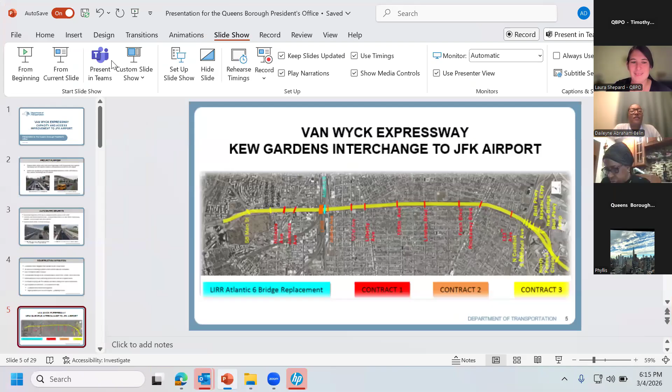Just let me share my screen. Can you guys see my screen? I have a lot of stuff on my desktop. Yes, yes, we can. Okay, we're going to do selection from Megan. Okay, so—

The Van Wyck is a capacity improvement project. The Van Wyck Expressway project basically spans from the Kew Gardens Interchange all the way to the westbound connector, which is about near Federal Circle going into the airport. The purpose of this project is to enhance traffic safety between those points—Kew Gardens and JFK. We made operational and geometric improvements, and structural deficiencies are being addressed on this project.

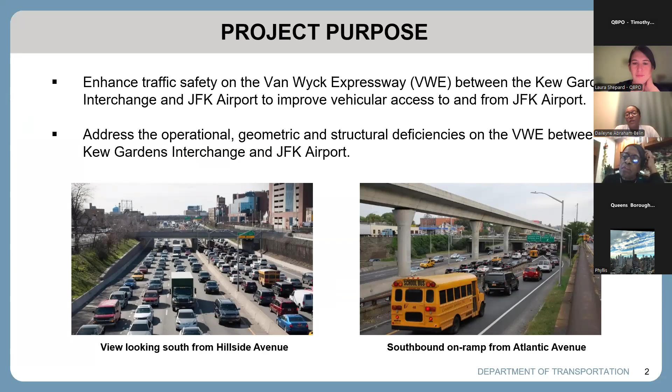So there's a lot of things happening that may not be that visible to you, but there's a lot going on with this project. The anticipated benefits—obviously we think there's going to be improvement with safety, because when we have that dedicated lane, you're not going to have people trying to make their exit to go to the airport by cutting from the left lane all the way to the right. So it's a dedicated lane that's going to take you straight to the airport.

The Port Authority also has a project we're coordinating with, called the Westbound Connector. So where we end, they start, and this will take you to Terminal 1 and 4 at the airport. We're also building a loop ramp that will take you from the Van Wyck to the Nassau Expressway to JFK, which will take you to all the other terminals you need to reach.

We anticipate reduced travel time, again because of this dedicated lane—you don't have to mix with the traveling public. You're going to have three dedicated lanes on the right for people going in and out of the Van Wyck, and then this lane that you enter but cannot exit until you get to the airport.

So basically, once you get in, it's a straight shot to the airport. We anticipate that it will reduce truck traffic as well on the local roads, because now with this added lane, and we have these three other lanes, so the trucks can go on and there'll be better movement on the Van Wyck.

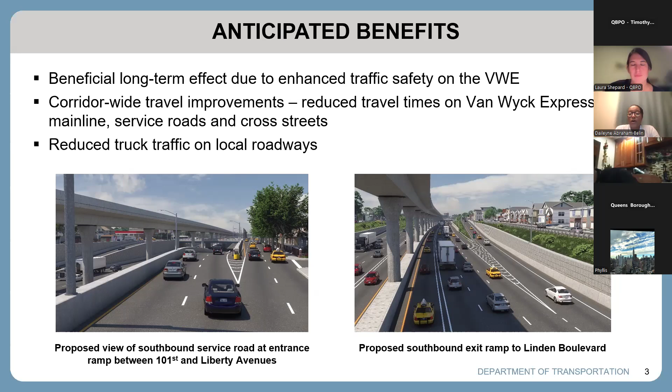Just in general, I wanted to touch base on some of the mitigation that we did throughout the project. As far as noise mitigation, we have a plan that's submitted by the contractor. We do air noise monitoring - that's a normal thing. Dust control, rodent control measures that we have.

We do have a community liaison for the project that if you need information, you can reach out to him, or reach out to either one of us, Luis or myself. We'll be happy to answer any questions that you have. We do provide notices, and that's the community liaison will send that out, or our executive office, our main office is in Long Island City. They will send out those notices when we're making changes to traffic patterns, if we're closing lanes, just so people are aware of the changes so you could plan for your travels.

There's a lot of coordination, like I said, with the Port Authority, especially on the south end of the project, because they are working there. So it's very tricky because anything that we do affects them and vice versa. So we have to be on the same page when we're doing any lane closures.

And any complaints that come in, we try to address them as soon as possible, whether it's potholes, refreshing striping. We just had these two major storms, so right now we're in the process of going out and we're going to be doing pothole repairs and some striping refreshment, because that way people don't get into accidents and your car's not damaged. But we had to wait for the snow to melt to be able to go back, and if it's raining, we can't do that. So bear with us, we're aware there are some areas that need some improvement, but the contractor is going to be taking care of that as soon as possible.

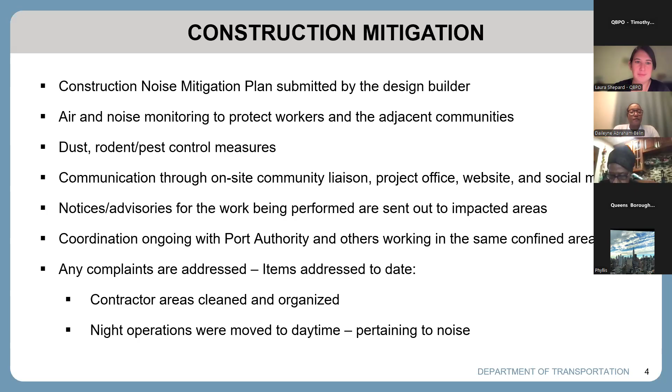So I just wanted to give a little bit of background on the Van Wyck. I know people know that we've been there for a while, but just for your reference, this project consists of four different projects overall. So the first one that we did was... can you see my cursor? Can you guys see where I'm pointing right now? Yes, we do. Okay, so right now, Atlantic 6 was the first project that we did.

So this was for Long Island Railroad. What we had to do in order to provide this extra lane, we had to widen the Van Wyck. In order to do that, we ended up having to take care of the bridges first - that was the first step. We had to push back the abutments. So this was the prototype that we did, and that was done in 2020, completed at the end of 2020. So it's a smaller project, but that's the first one that we did as a design build.

The second project, which was contract 1, and that's all the ones that you see in red here, that was about 9 bridges that we had to do. Luis was also the project manager on that, and we widened all these bridges in order to make that space. That project was completed in November of 2023.

Currently, there are 2 projects for state DOT going on the Van Wyck - contract 2 and contract 3. Contract 2 is around here, it's for Long Island Railroad and one regular bridge that we have. And contract 3, which is the big one that everybody sees, is the one that spans all here in yellow. It's about 4.8 miles, I would say, and that's the widening, and that's the one that we're adding the lane. And that's the last step for the Van Wyck.

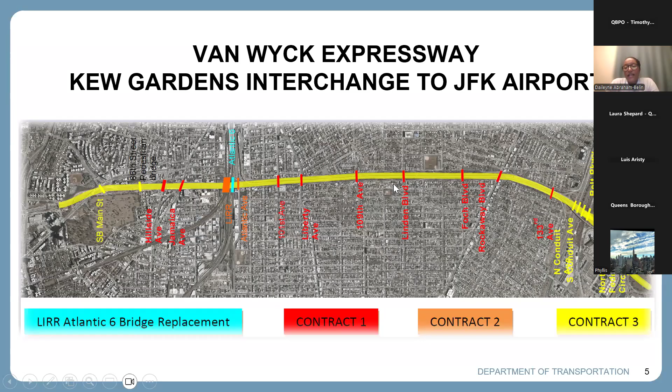So I'm just going to speak a little bit about contract 2. As I mentioned, we have a double-decker bridge on that contract that we're retrofitting, which means we're still keeping the same footprint, but we're making improvements - we're changing some of the steel, the bearings, and things like that.

We also have mainline 1 and 3. The next slide will show you these bridges, but I just want to tell you what it is right now. That was completed already. We did it on 2 super weekends. We had 1 weekend where we shut down the southbound Van Wyck and rolled in the bridge, then did the same thing for the northbound. The first one was in April, and the second was done in October.

Finally, we have the replacement of 94th Avenue Bridge and Atlantic Avenue. That was completed in 2024. So right now, the only bridge we're working on is the double deck bridge on that contract, and we expect to be done in spring of 2026. There's some work on the service road, some paving to be done, just to make sure it's in good condition when we leave. There was a wall done and also a lot of utility work, as the borough president mentioned. There's a lot of utility work underground that you don't see, but that needed to be done first.

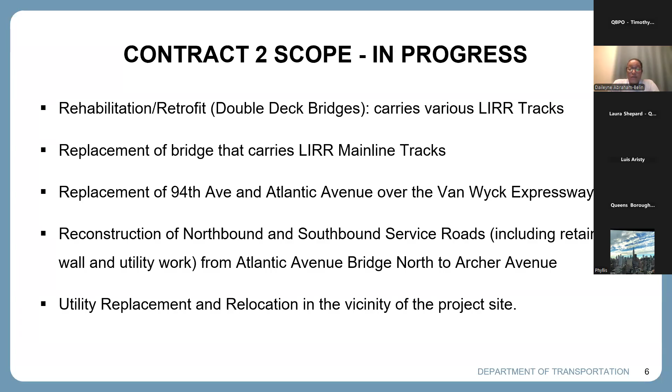One of the first things we do in the contract is all our utility work. So that's one of the reasons people driving by maybe didn't really see much progress, because that needed to be completed first. So just to give you the graphics of how it looks, mainline 1 and 3 is the one I said we did in 2 weekends.

This is the double deck, so you have the lower portion and the higher portion of it. And finally, Atlantic Avenue Bridge, which was completed as well.

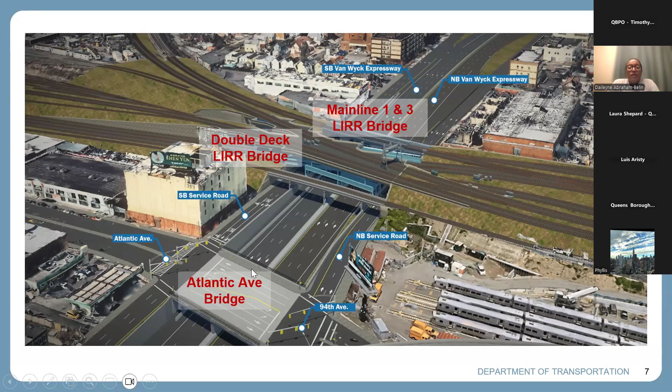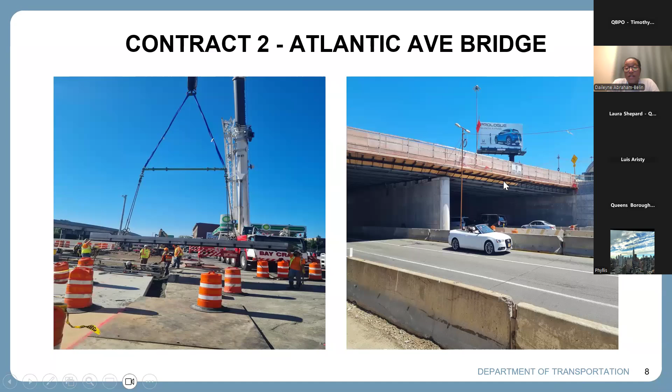I just wanted to show you guys a couple of construction pictures. Obviously this is not the case currently - we were doing some of the concrete work, and this is just showing the construction, so you can see how it looked. But right now, that bridge is completed. This was for the mainline 1 and 3.

As you could see, what we did was assemble the bridge. We had a little staging area just north of there where we put all the steel together, and then we put it on this machine and rolled it in and put it in place. We had to do that over the weekend, needing a lot of coordination with Long Island Railroad because outages were needed - they had to change the tracks for some of the trains.

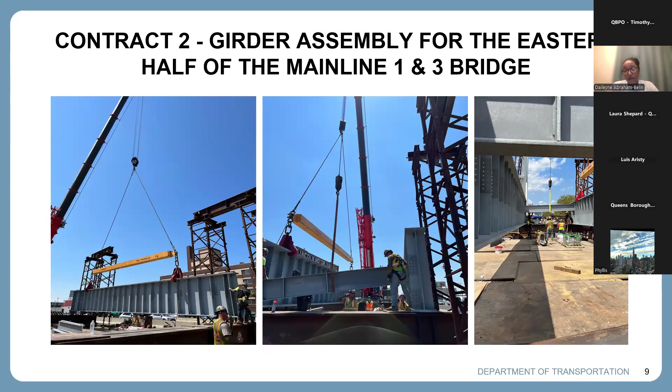They couldn't go on that track over that weekend because we were demoing. So we would demo the existing bridge, pull it out, remove it, then push the new bridge in, put everything in place and align the track. We worked really closely with Long Island Railroad for that. This is the final product when it was completed - that's the new bridge right now.

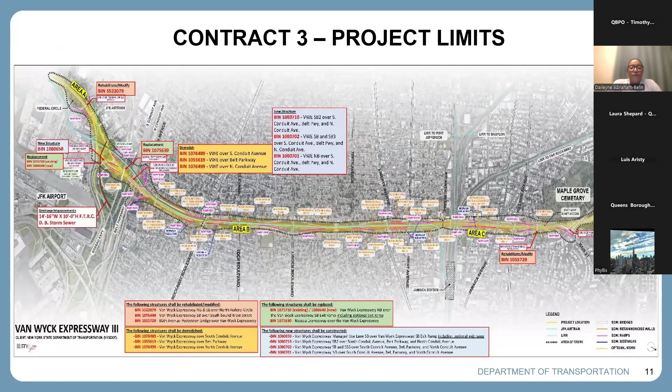Contract 3, as I mentioned before, is the biggest one. It has the biggest footprint, and that's probably the one that impacts people the most due to the footprint and the amount of work needed. So we split it up into 3 sections. Just to give you a general idea, we're adding an HOV lane, as mentioned earlier. It's an HOV 2+ lane, so you need at least 2 people in the car, and no trucks are allowed on that HOV lane, but vehicles for hire can use it.

So you can have Uber or a taxi, but they at least have to have 1 passenger in the car. There's a lot of changes to the ramps - most of these ramps are mostly done. We have 3 ramps left, but they're on the north end of the job. We do need to do some paving, but obviously couldn't do that with the storms we had, and we have to wait for temperature. So probably in April, you'll start seeing more of the paving being done.

We did these bridges - there's 1 new bridge, which is the MUL, and that's the HOV. We called it managed use lane. That's the only new bridge that was done; the other ones are basically retrofitting and widening. We did a bunch of retaining walls, and when you go by, you'll see it - there's some nice patterns on them. They look really nice, I would say.

There's about 17,000 feet of that we're building. There's 12 new noise walls we're doing, about 10,000 feet, ranging from 8 to 28 feet. What I'll say is you'll see the noise wall.

It's easy to see which ones they are because they have the clear acrylic on top. One of the reasons we did that is because people who live off the service road, when you have a noise wall, you basically block out the sun. We wanted to make sure people don't lose that, so we used acrylic on top of the walls that still gives you light, so people don't feel like they can't get any sun on their property off the service road.

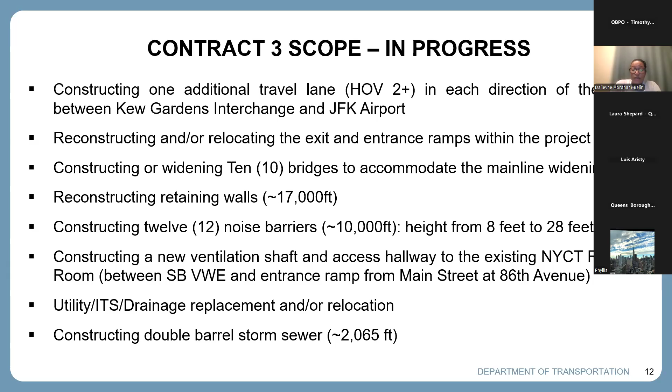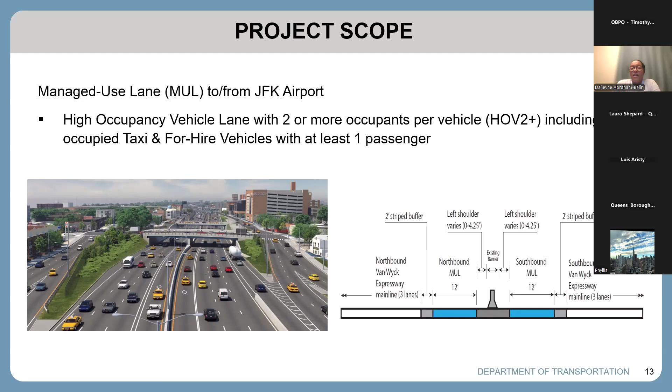There is an enforcement area. We typically don't do enforcement, but we did provide two areas where police can be stationed so they could give tickets. So be mindful of that.

This just shows you the overall MUL. As I mentioned, on the right you can see from around Hillside Avenue all the way to Federal Circle—that's the limits for this.

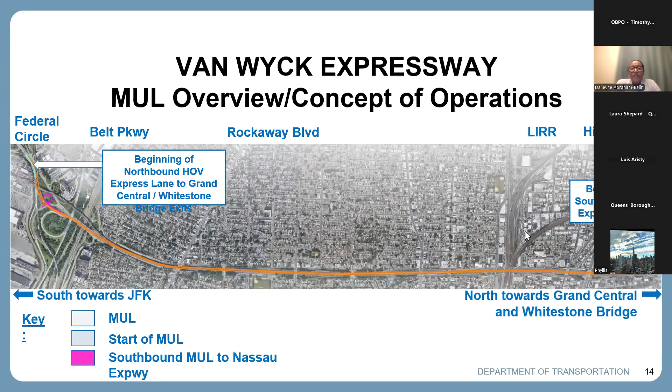I have a little graphic for you. This is where it starts, and the end of it is all the way on the other side, where the Port Authority's job meets our job.

This is the loop ramp I was talking about. So you have the MUL going into the airport this way, and then this loop ramp takes you to the other terminals.

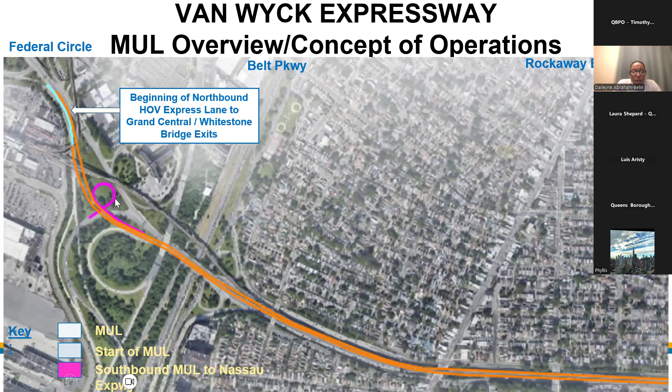As I mentioned before, these are your two enforcement areas, one for northbound and one for southbound. There are a lot of cameras, and there's a joint traffic management center monitoring them. So if anything happens, like someone breaking down, they can always call NYPD. Police are at the joint traffic management center, and so is City DOT, so they all have eyes on this once we're done.

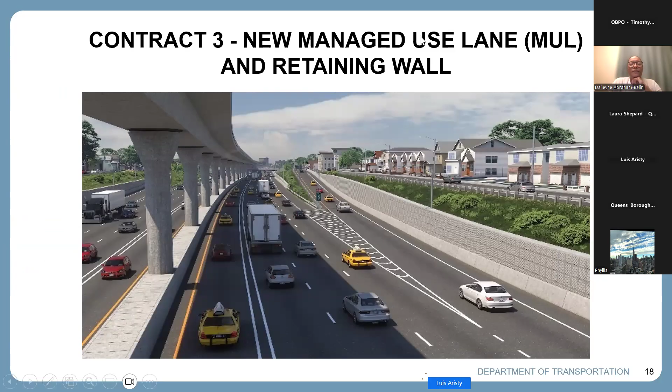As Daileyne has said, I am the engineer in charge for the project.

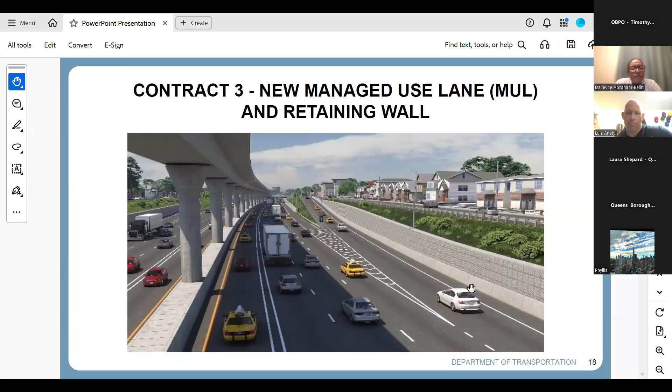This is another picture of how the service road is going to look, close to Jamaica heading into Atlantic Avenue. As you can see, we have the sound wall with acrylic on the top portion, as Daileyne said before. This allows the sun to get into the houses, so people don't feel like they're in a jail.

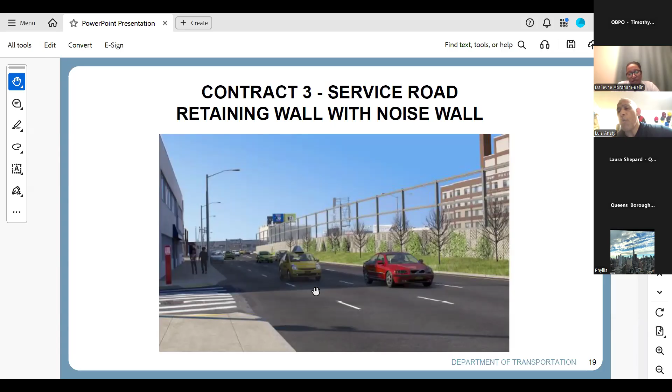There will be a minimum of 2 lanes on the service road. Some of the service road at this time, as people living in the area may see, is kind of beat up, but we will mill and pave the entire service road from Hillside all the way down to 133rd Avenue.

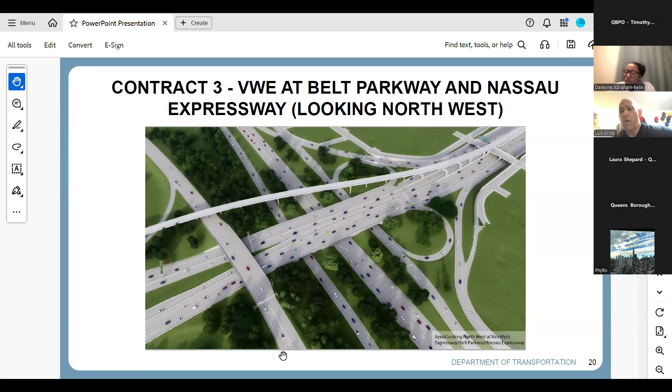This is the famous double barrel sewer that we have built, about 2,065 feet. It was a challenging project in this section, because as Mr. Borough President said at the beginning - I didn't know this myself - the ocean back in the days used to go as far as Linden. So all of this work in this area, we had to do it on piles.

It was a little challenging because the water table is extremely high, so we had to have pumps running 24/7. Otherwise, by the time we come in the morning, it would be flooded with ocean water coming into the work site. We've been pumping water here daily for the last 2.5 years. Thankfully this work is already completed, and DEP will finish it in the future.

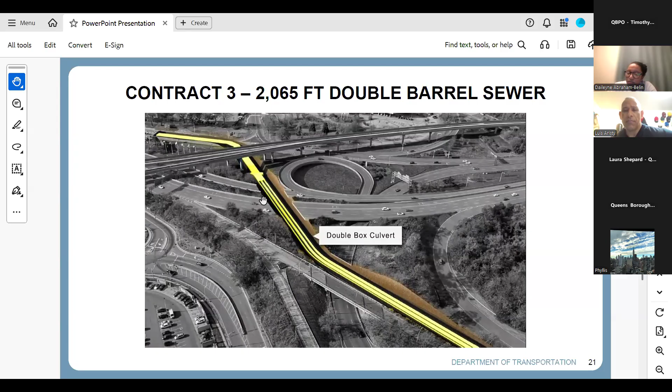This is actually how the double barrel sewer looks, and how it looks from inside. It's 2 chambers, so you could actually put a truck through each chamber - it's massive. The whole idea with the double barrel sewer is that if the area gets flooded, all the water is going to get into this section.

Between the wall, this is only one chamber - there's another one adjacent to it. In between, we have windows so that in case one of the chambers gets filled, it's just going to overflow to the next one as a factor of safety.

The airport is right over here, and the Nassau will be back here. This is the east end of the double barrel sewer. This pipe, as you can see, these are PVC pipes - those are the ones we used to keep pumping water throughout the construction.

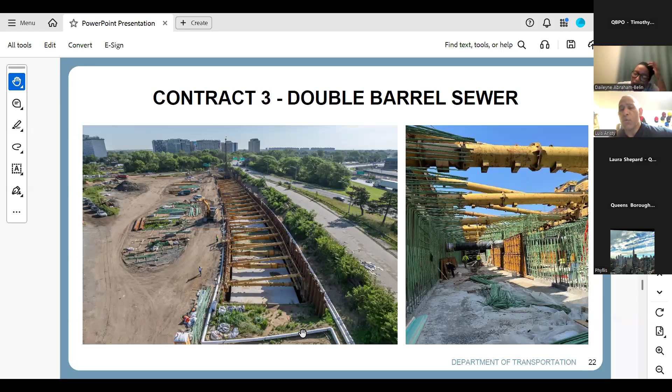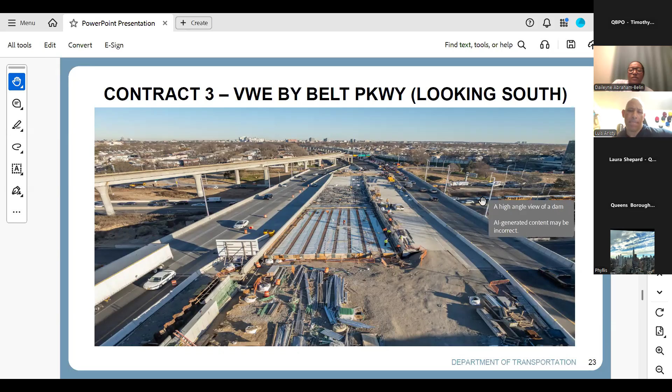The original ramp used to land right at the intersection, and that was problematic because people wanting to make a right into Jamaica going east would have to go through all the lanes. It was an imminent danger for the public.

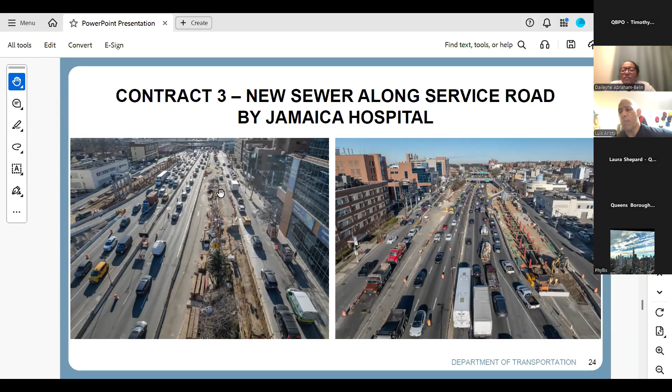Some of the complaints have been that it has taken a lot of time, and we fully understand, but it takes a lot of time to actually build the roadway. We put a new drainage system in here. Most of the structures, as I said, are on piles, and over here what we're doing is constructing the concrete base. So this area will then get a 3-inch asphalt overlay.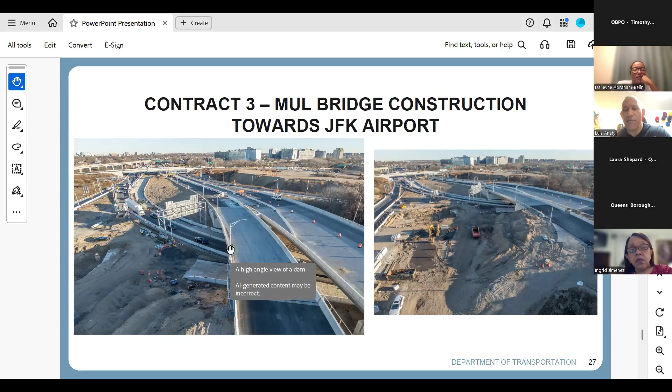I don't have a question, but I wanted to add a couple things. We're working closely with Port Authority for the MUL because they're splitting the airport. That's why we have the MUL going to 1 and 4 and then the loop ramp going to Nassau Expressway to JFK, because that's how they're splitting the airport. So just so you know the intent behind it, it's because of what's happening at the airport. That's how this came about.

And as Luis mentioned, there is going to be a lot of planting at the end. We're going to do all the striping, all the walls are going to be nice. We're going to clean up everything because I know right now it doesn't look as great during construction, but the plan is to clean up everything at the end of the project and make sure it looks nice and that people are happy with what they see when they're driving on the Van Wyck.

Thank you, Daileyne. So over here, we're having a drone picture for a better understanding of how it's going to look. For example, this is the Rockaway exit ramp coming from the airport. If you're going to exit Rockaway, this is the exit ramp.

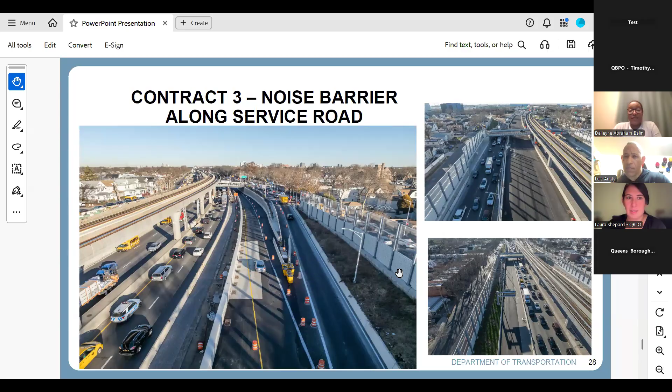That's a promise to the public. Yes, and this should be the last project on the Van Wyck. And that will be it from our side. Any questions will be more than welcome.